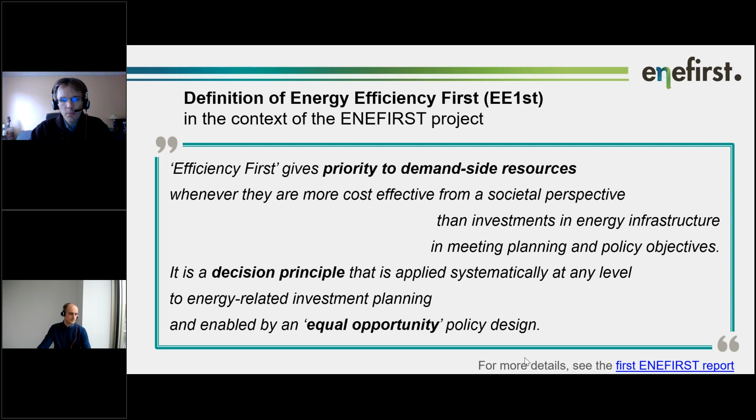So what does it mean in practice? It means the first point is to consider the energy systems as a whole, so considering both sides all together, the supply side and the demand side, and being as systematic as possible in the review of the possible options when an investment is needed, for example.

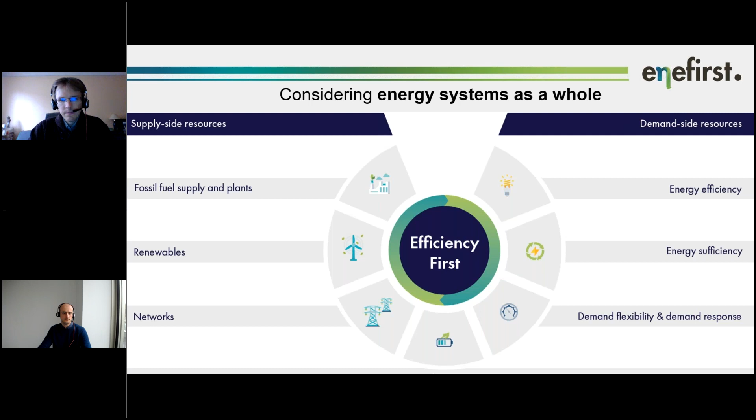Next slide, please. And the second part about making a fair comparison is to adopt what we call a societal perspective. What we mean here is to take into account multiple impacts, so not only the direct energy aspect, but also other connected impacts such as greenhouse gas emissions, possibly GDP or whatever impacts can be relevant according to the policy objectives, because that's a decision principle that is connected to policy objectives.

And this other aspect of the societal perspective is to adopt a long-term perspective time-wise. So not only considering the next years, but up to 2050, which is, let's say, the general time horizon for the long-term energy and climate policies in Europe. Next slide, please.

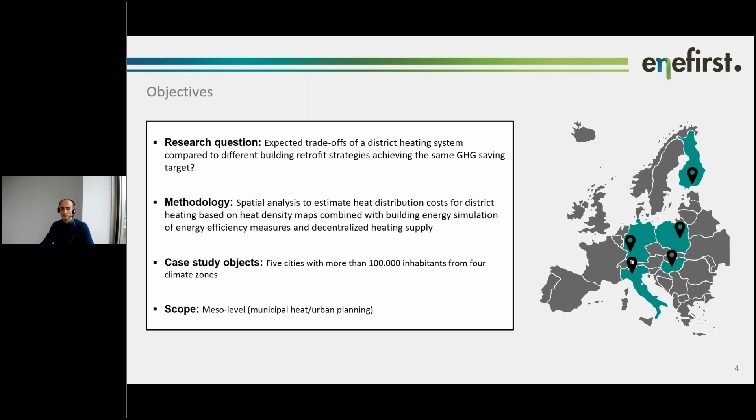For the methodology, we have applied spatial analysis to estimate the district heating distribution costs based on heat density maps, depending on the type of scenarios that we have calculated, and we have also included the individual heat supply options in order to calculate the total cost of heat supply for the 5 cities that we have selected, which represent almost all 4 major European climate zones. The scope is on a meso level, or municipal heat and urban planning activities.

So we have chosen the city of Karlsruhe here in Germany, then also Budapest in Hungary, Milan in Italy, Warsaw in Poland, and Helsinki in Finland. So here are just some status quo information about the district heating length and the market share and the district heating density.

We can see that it varies between the cities, where Warsaw and Helsinki can be probably placed in one group with relatively high district heating market shares above 80%. Karlsruhe and Budapest have quite a similar district heating market share, whereas Milan has a bit lower and has the lowest market share of all the study objects. The population density, as you can see, is also quite different within the cities, as well as the linear heat densities that represent the currently installed and operated district heating systems.

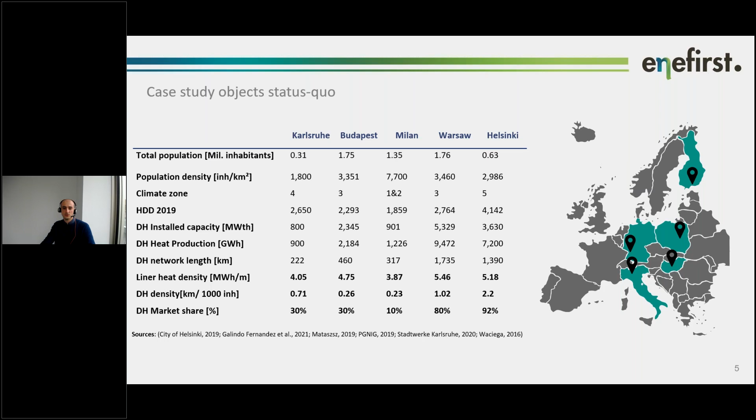Very briefly about the methodology, we've used 3 models, which are softly coupled, so to speak, a soft connection between them to assess the total cost of heat for each of the scenarios. For the building energy demand, we used INVERT, which is an energy system model developed by our colleagues at the TU Wien, which provides the heat density.

I hope you can also see my mouse here on the screen, which provides the heat density per scenario on hectare level to the NetHEAT energy system model, which deals with the district heating networks, and on the other side it connects with the Enertile model, which is developed by our colleagues at the Fraunhofer ISI to calculate the individual heat supply mix as well.

So with this methodology, we are actually able to evaluate the total cost of heat supply, since on the one hand we have the renovation costs, building refurbishment costs. On the other side, we have the heat network costs, as well as the individual heat supply mix.

And we have modeled 3 different scenarios with varying average refurbishment rates throughout the years, starting at what is probably the current level of 1%, and then increasing to 2%, which is the goal of the renovation wave, and even 3% refurbishment rate, which can be observed maybe as an extreme: 3% of the total gross floor area being renovated annually until the year 2050.

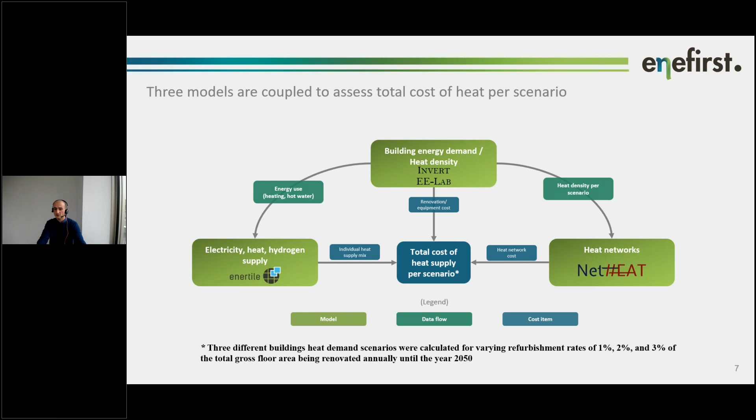So since we are discussing at this webinar mostly the connection between building refurbishment and district heating networks, I will actually focus a bit more on the NetHEAT model and explain the methodology that the NetHEAT model uses. So the basic principle is that we are stacking different files on top of each other, and this way we can create a matrix system, mathematically speaking, and calculate the cost, number of buildings, district heating length, etc.

So there are, in principle, 4 major input files. The first one is the heat demand and the heat density, which comes from the INVERT model. The second one is the number of buildings, identified buildings within a hectare level. The third one is the streets. We use the street length to calculate the pipe length as a function of the street length and the number of buildings. And at the end, we use the topography, or the imperviousness density in this case, to calculate the costs.

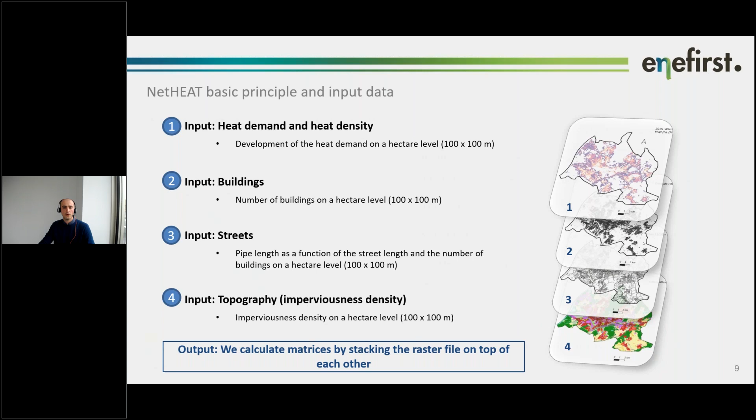But I will show briefly a few examples about each layer before we go to the result part, since it's quite important to actually understand how we've modeled and how we came up with these results. So based on the heat demand and the heat density provided from the INVERT model and the Hotmaps tools that we have used previously, we are identifying regions with suitable heat density thresholds. So on the left side now you can see the city of Warsaw in 2017, the heat demand.

So if we, for example, say, okay, we are interested as a predefined benchmark value only in regions with 20 gigawatt-hours per square kilometer, then we can see with this reddish value on the map those regions that are within this benchmark value. If we increase this value to 40 or 60 gigawatt-hours per square kilometer annually,

we can see that these suitable regions are actually shrinking. We look at the hectare level and we calculate the sum, because the hectare level is quite small in principle, so the decisions are not being made on a hectare level whether a certain region is suitable for district heating or not. So for these reasons, we look at each cell and we calculate the sum within a radius of 1 square kilometer. And if the sum is within these predefined threshold values, then we assume that this region, also in the future, with the future heat densities, is suitable for a district heating network.

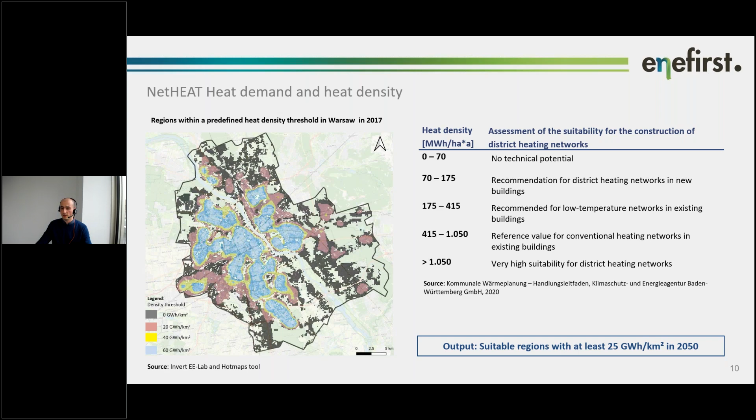Of course, we made this decision so that in the future we can actually see which regions are suitable for district heating networks. So this was the predefined value. We can also vary this value, and I will briefly show that in the results as well.

In the second step, we are trying to identify the number of buildings within the cities, and for this purpose we use the OpenStreetMap tool, and we applied several different filters, such as the floor area, type of building, if there's an address provided, etc., in order to identify all of the residential and non-residential buildings.

At the second step, we define a correlation between the district heating share and the number of connected buildings. So if we know that in a certain city we want to achieve, let's say, 50% district heating market share, we can see that to do so, we have to connect at least 30% of the buildings, since not all of the buildings have the same heat demand.

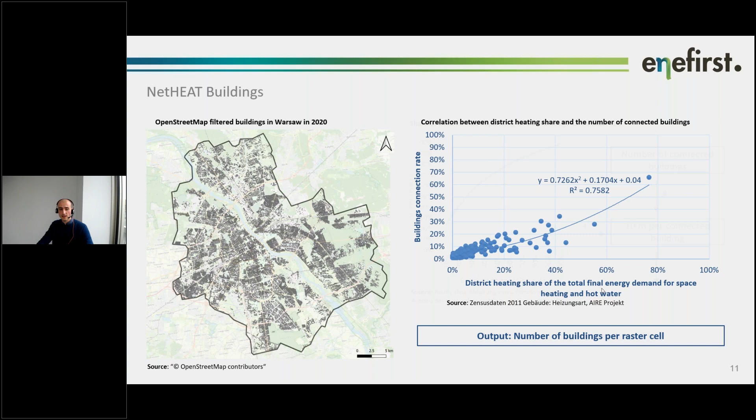This is based on the census data for Germany, and we have extrapolated this value for the other cities as well. The goal is to get the number of buildings for each raster cell. In the next step, we have a look at the street length and the roads. Here is also an example for Warsaw.

Why do we actually do that? We use the same methodology that colleagues here in Germany developed, meaning that if I have a 30% connection rate in the buildings, I need to use around 50–55% of the street in order to be able to connect. Obviously, we are making these assumptions because we don't know for each city which building is actually connected currently,

and if the district heating network is expanding, we cannot know which buildings will be connected to the network in the future. Nevertheless, we are applying this methodology to estimate the number of connected buildings, and the street and pipeline required to connect all of these buildings. Additionally, apart from the street length, we assume 10 meters per building to connect it.

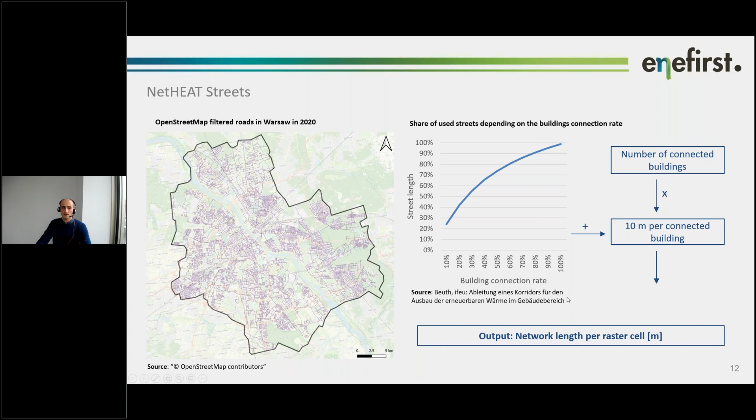Then at the third step, we have a look at the impervious density. Why do we do this? Because the impervious density can give us a first rough estimation of the potential cost. We want to differentiate, since, as we all know, it's quite different to build any infrastructure in densely populated areas.

The impervious density shows us the amount of land which is covered by concrete and asphalt. If it's above 80%, we can assume that the highest cost applies in these areas. Area 2 represents areas with a dense urban fabric between 50 and 80%, and area 3 are medium to low urban fabric areas with impervious densities below 50%.

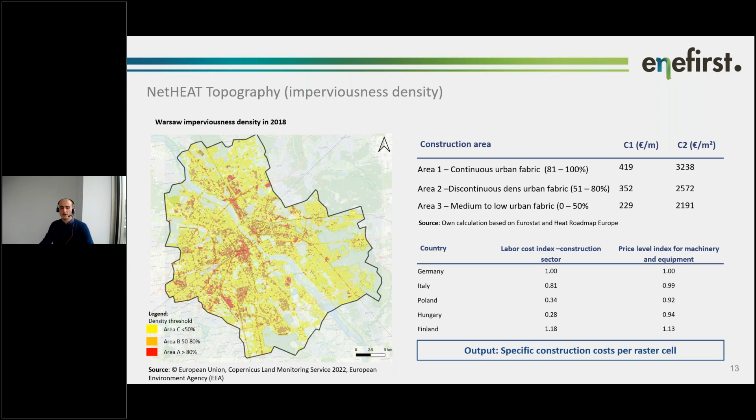To differentiate between countries, we use a different labor cost index in the construction sector, as well as a price level index for machinery and equipment. The goal is to have the specific construction costs per raster cell, so on hectare level, 100 meters, 10,000 square meters, so to speak.

We use the equation from the top-down approach from our colleagues from the Heat Roadmap Europe, which you're probably familiar with. But since we want to take all the local particularities into account, we applied some combination of the top-down and bottom-up approach. Our colleagues have used this ingenious method to calculate the capital distribution costs,

and we have made a few changes, since they use the plot ratio or building density to calculate cost coefficients. We are using the imperviousness density. For the pipe length, we use the length of the streets and the connected buildings, and for pipe diameter, we use the mass flow and the maximum flow velocity, assuming a constant pressure drop, for example 150 pascal per meter. By doing so, we are able to calculate a specific investment cost in euro per meter for all of the areas and all of the different pipe diameters.

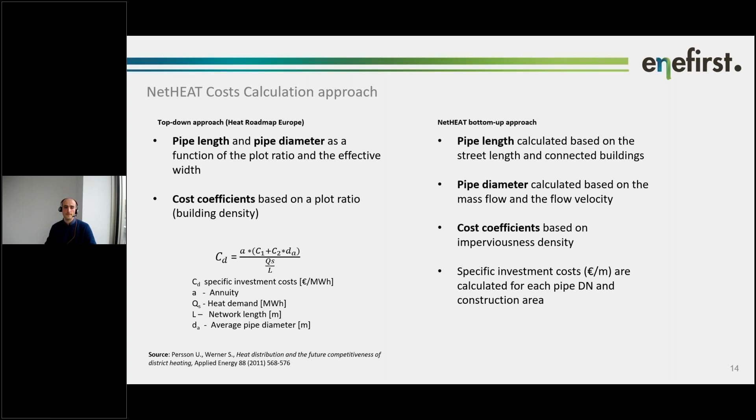Last but not least, we know that the district heating supply mix has to change. And in order to be able to compare the building refurbishment impacts across cities and scenarios, we have assumed a generic fuel mix in 2050. This generic fuel mix has been applied in all of the case studies. What actually varies are only the installed capacities of the required heat supply plants.

Nevertheless, the mix consists of heat pumps in 2050, partially industrial excess heat with 25%, synthetic gases with 15%, or also biomass and biofuels with 15%, followed by geothermal with 10% and solar thermal with 5%.

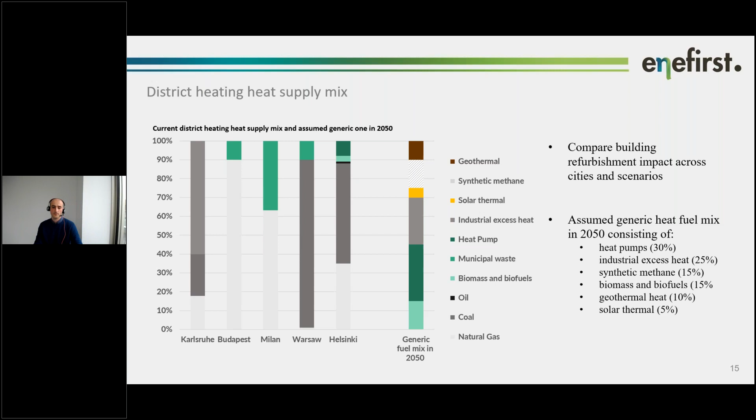And also, maybe just a summary of the methodology before I try to answer some of the questions that I hope you have, since I tried to put a lot of information in a very short period of time. As a summary, what we have done is, first, we have 3 different building refurbishment scenarios. Second, we have this benchmark value to predefine, so to speak, suitable district heating regions. And as a third step, we are varying the connection rate of the buildings.

And the fourth step, we are calculating the individual heat supply technologies classified in these 8 building types. And these are the specific costs, so to speak, that we calculate for each of the building type houses. And at the end, we have the total cost of heat for the scenarios, which include the building refurbishment costs, the district heating supply costs, as well as the individual heat supply costs.

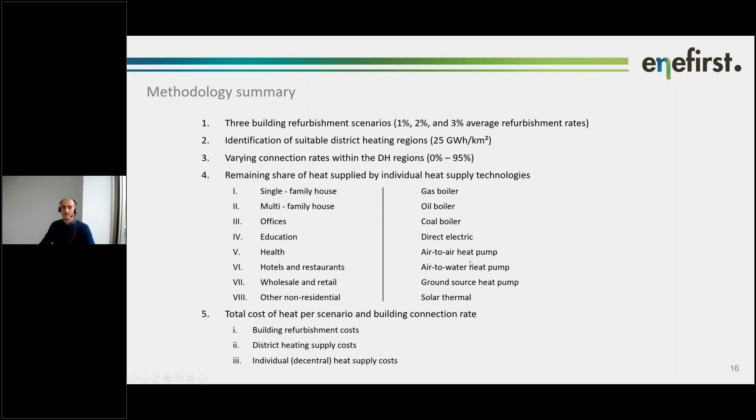So with this, I'm actually finished with the methodology part, and I would like to answer a few questions, which I think will be quite suitable before we go to the results. So I don't know if you have written something in the chat, or maybe Jean-Sebastian.

Yes, there would be two questions for you to start the discussion. The first one would be: what makes the methodology that you have presented different from, let's say, a classical energy planning study or a classical study that a municipality would do to identify the needs and plan the development of district heating?

Well, with a few exceptions where you have heat planning on a municipal level, obviously there are many cities that are already doing this. But if I have a look at Germany, this is now only required in one of the German states, so only in Baden-Württemberg. So for many cities, this is actually a completely new method. They never applied anything similar to this. They have been developing the infrastructure. Well, parts of it have already been developed due to some historical reasons.

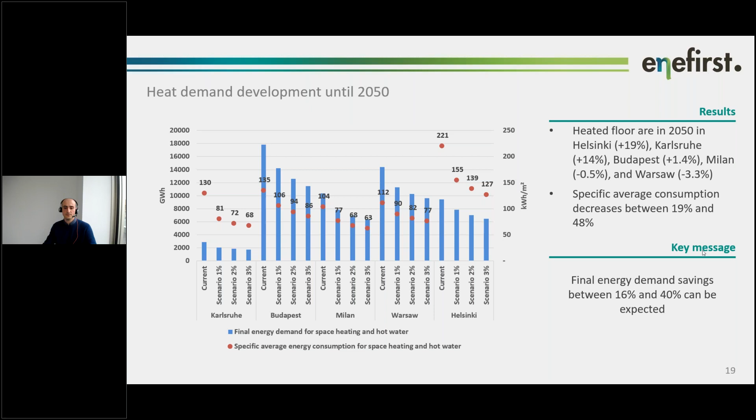If we have a look at the individual heat supply units, we know that currently individual heat supply is dominated by fossil fuel boilers. In our assumption, we have assumed that the national results will also trickle down to the local level. From today's perspective, this is not correct, because we see large differences between the cities and rural areas. But in the future scenario that we have considered, we see a drastic increase in the share of individual heat supply by solar thermal and heat pumps, which means that the differences between urban and rural areas will be much smaller in comparison to what we see today.

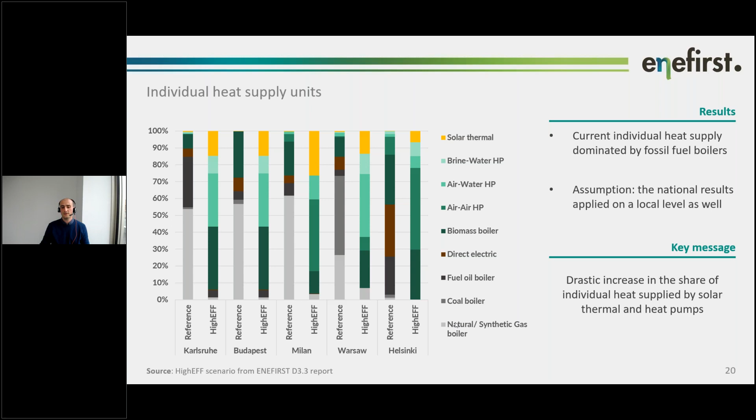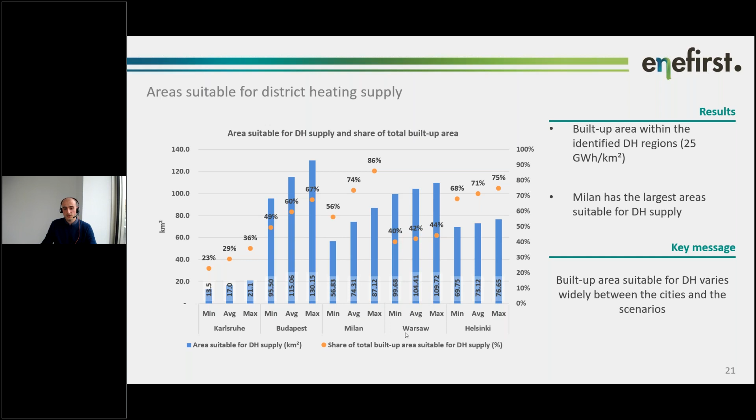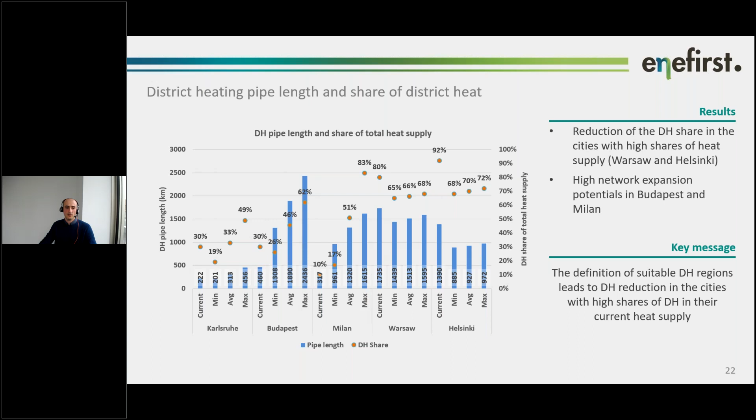So last but not least, the goal was obviously to calculate the total cost of heat supply, and we see that, for example, here we have the city of Milan. We have seen that up to 83% in some of the scenarios of the heat can be supplied by district heating in a cost-effective manner, with the 1% renovation scenario the cheapest one.

Yeah, as said, in almost all of the scenarios, it's actually cheaper to invest in district heating in comparison to individual heat supply. Obviously, this refers to a certain specific level. If we go above this 83%, then this will change.

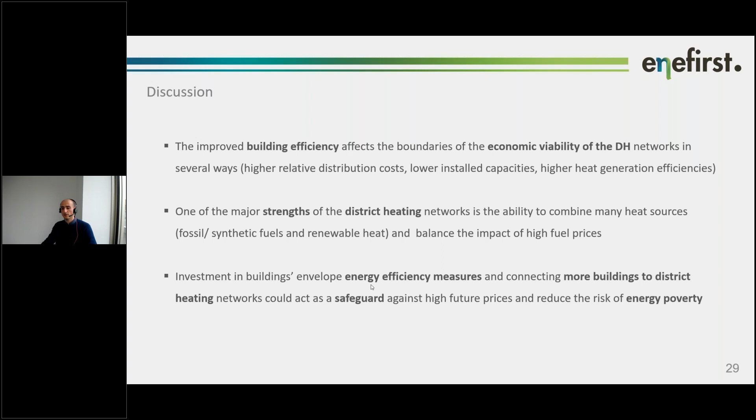To conclude, we already mentioned that the reduced heat densities can actually increase the relative price of heat distribution. Nevertheless, if we maximize the connection rate within the identified district heating regions, we will, in most of the scenarios, have a lower total cost of heat. And from our perspective, municipal heat planning as a strategic approach can ensure affordable heat supply by properly implementing and monitoring the efficiency first principle.

I've put a lot of information, I know, in a very short period of time, but it's actually quite challenging to consider all of the data and all of the information and to model everything up until 2050. So in that sense, heat planning should be part of urban planning, and this will be our recommendation, because otherwise it's very difficult to see to which extent you should install new heat generation capacity, to which extent you should expand the network, or in some cases reduce the network, so that you can provide affordable heat to all of the citizens.

And with that, I will conclude, and I think we still have 10 minutes. Sorry about that. I was actually hoping we'd have a bit more time for the discussion, but there is a lot of information, and I had to compact everything in very few slides, so to speak. So I'm really looking forward to the questions. I cannot see here, Jean-Sebastian, if you can.

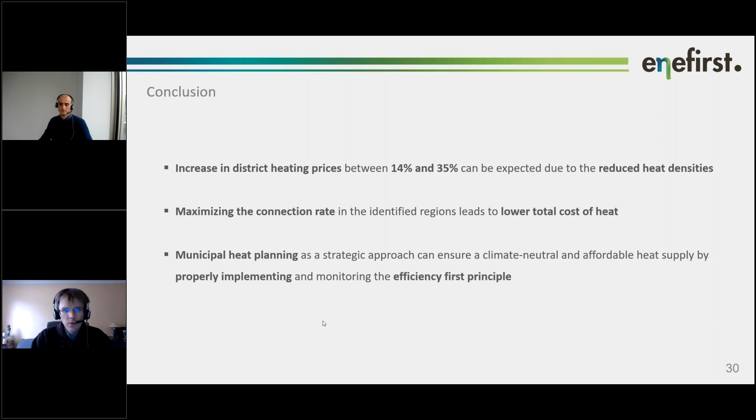Yes, about the levelized cost of heat. Does it include the carbon price? Because here you have for Warsaw a large share of coal, for example, and the cost is much lower in the current situation than in 2050. Yes, but

the price has increased. Also the CO2 price, although this I don't think it will have such a drastic impact. The prices are still quite low, and they use CHP power plants, coal-fired CHP power plants built many years ago. So the levelized cost of heat will probably increase if we apply the new ones.

We have used CO2 costs from 2019, I think, or 2018. I have to check. So it's here, but not the current CO2 price, which is a bit higher. I think it's around 90 euros per ton at the moment, or around that value. But we haven't applied that here, so it's a bit lower. I think it was around 35 or 40, if I'm not wrong, which obviously cannot impact the prices. This is still a very low CO2 price to have a drastic impact on a coal-fired CHP power plant.

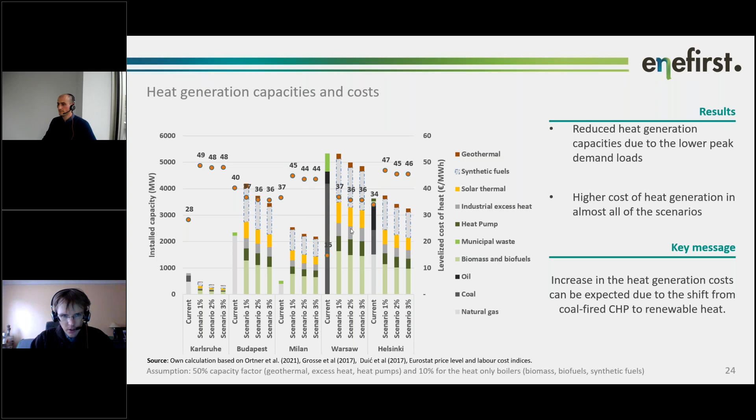Yeah, no problem. The next question is about what you presented as total cost. So just to clarify, over what period is it calculated? Is it between now and 2050, meaning over 30 years? Yes, and in this case, we have actually selected only 1 year, so this should be 2050. But obviously, there are some variations.

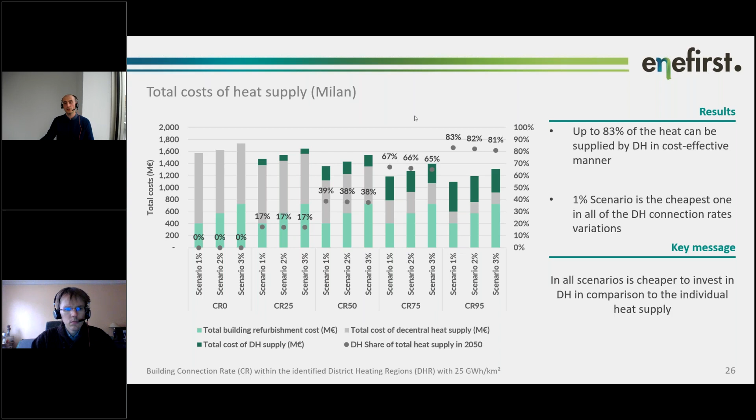Now the question will be with which tempo we can actually, which is also a very good point in implementing the energy efficiency principle, and why you need this municipal heat planning is because if I foresee a certain period of time in which we will invest into the network itself, but the building refurbishment is not being completed at this step, obviously that will lead to an oversizing of the pipeline itself.

So this is another challenge that we see, because if I connect customers today, I need to supply their needs today. I cannot say, okay, I have a lower capacity, I will supply your needs in 2035 or something like that. So this is a very good question, and that's why within the municipal heat planning activities, there's this reoccurring event where you have to actually prove and see, okay, what are the prices, what is the current development, etc., so that you can improve and readjust the decision.

So the way I see the implementation of the energy efficiency first principle will be a reoccurring process. So this is not going to be, okay, I have calculated this and now I have 1 year. These are the data for, I think, 2050, what can be expected. In my opinion, it's not going to work like that, and you need some reoccurring process in, let's say, 3 or 5 years, where you can reassess what actually has been implemented, so that you can really say that, yes, we are applying the energy efficiency first principle in our municipality, for example, or in our utility.

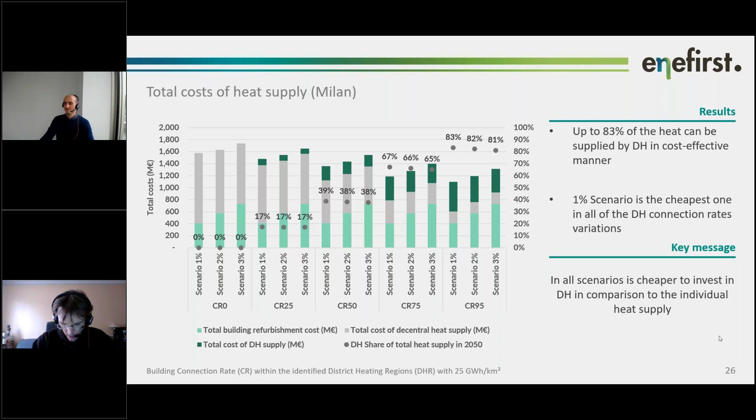That's clear. The next question would be about what you have shown in several graphs of the results, that the district heating price would increase in most cases. And so the question would be related to the general trade-off questions you mentioned at the beginning of your presentation. To what extent can this higher heating price be compensated by the lower heat demand due to the renovation of the buildings? So how do you see the optimization

between? Yes, so in order to fully optimize this, obviously, as I mentioned, this is one disadvantage, that we have applied a generic fuel mix, so that we are able to compare different costs.

But in reality, if, let's say, I work at the utility in Budapest, the first thing that I will actually look at is the heat generation cost. So if I have a lower heat generation cost, that gives me more freedom to expand the network. If I have a high heat generation cost, so to speak, then in that sense I am already

bounded to this heat generation cost, and if I expand the network drastically, and at a certain point the customers are not willing to pay for it and they start disconnecting, this will have an exponential impact on the cost. So if the customers start disconnecting due to high heat generation costs, and due to the fact that I have to shift now from coal to, let's say, geothermal heat, although the price probably will not be that high, it's a mix of different impact factors.

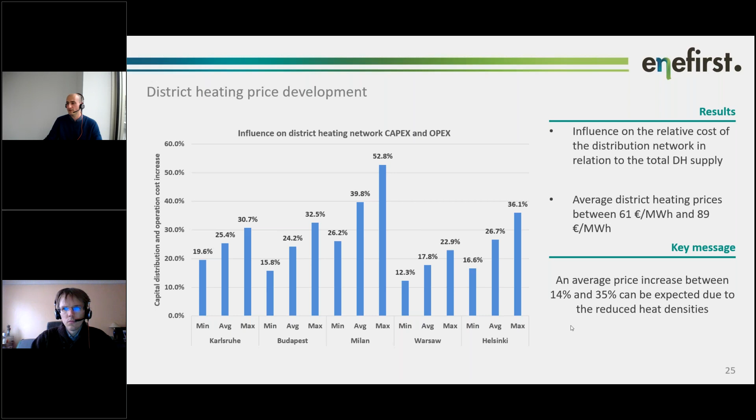So it's not that easy to look at different cities with different typologies within Europe and come up with one conclusion. One interesting indicator is, of course, the linear heat density. This you can apply everywhere, so to speak. But there are also utilities, for example in Germany, that say this is too low. Anyhow, we don't want to go below 3 megawatt hours per meter. This is from today's perspective, of course, but this will change in the future.

And as I said, if we have a cheap heat source, this indicator can go even down to 1 megawatt hour per meter. But if you have higher costs than you have today, then it will be difficult. So this is a question that I know many utilities are already dealing with: how to avoid this issue in the future when you shift from very cheap to higher heat generation costs. How can you keep the customers connected?

Because if they start disconnecting, you probably see scenarios like in many Eastern European cities at the beginning of the 1990s, where many people were not able to afford the increased prices of district heating, and although the share of district heating is still much higher than in Western Europe, many district heating networks even ceased to exist due to this fact.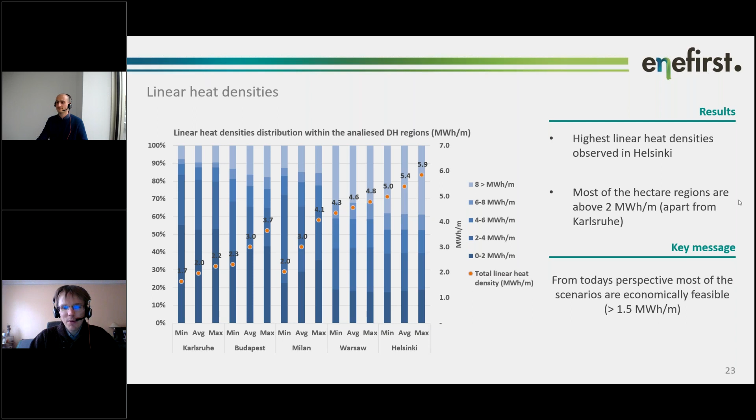We encourage the participants to contact us if you have further questions or want further details. In the coming months, the report about these case studies will be published on the website, probably in May. So after the end of the webinar series, you would get the full report. And there are also papers about these case studies currently submitted for special issues in journals about the energy efficiency first principle.